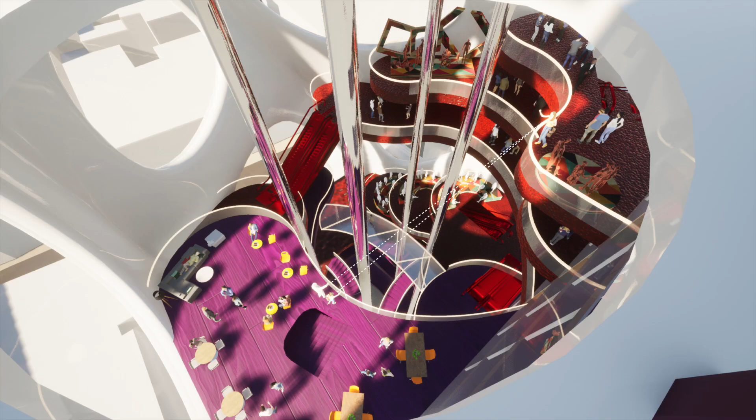Program-wise, the tower consists of museums, offices for sustainable fashion startups, retail, event spaces, recycling, co-working spaces, and a transportation hub. The program doesn't only benefit from each other to foster upcoming fashionistas, but also encourages interaction with surrounding office workers, tourists, etc., effectively challenging the current business model of the industry by bringing designers closer to the buyers.

The tower is not just a cultural ghetto, but a social catalyst which knits into the city fabric.

The tower is situated in the financial hub of London and is close to one of the fashion clusters in Bethnal Green. While the tower doesn't sit in the assessment zone of any viewing corridors, the height of my tower is limited to 160 meters to hide away from the backdrop of St Paul's from Fleet Street.

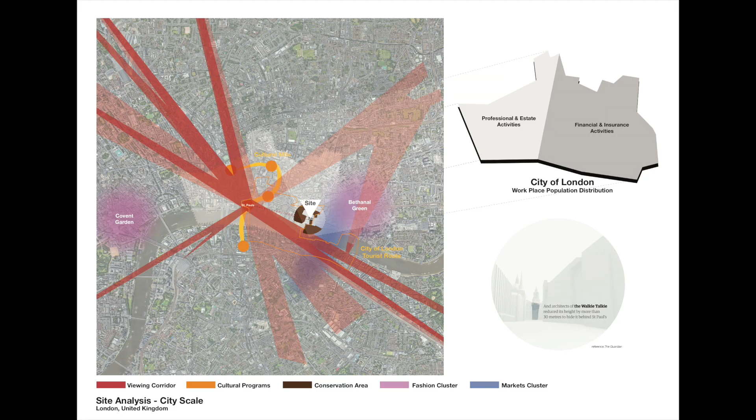On a more local scale, my site is situated on two heavy traffic streets, with a bus stop in front of my site and also two interconnected stations nearby.

My site is also adjacent to a shopping centre, with the types and size of the shops represented by the colour and size of the blobs respectively.

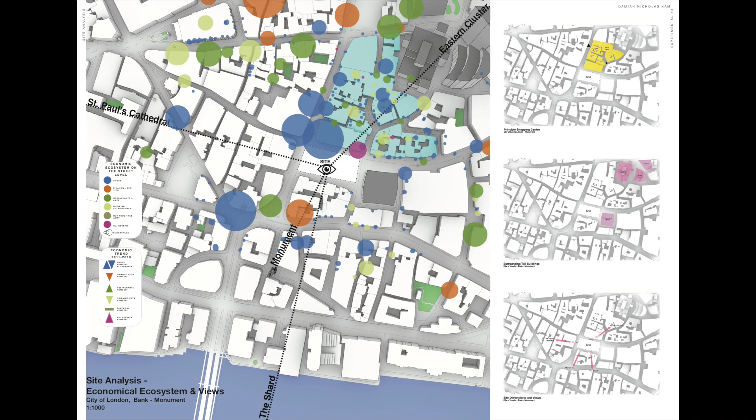After analysing the economic trends for the past 10 years, while the City of London is known for being a financial centre, the city is actually encouraging the integration of other industries, as financial services can be digitalised.

My site is also on Fenchurch Street, where the Livery of Clothworkers are freeholders of many of the lands. Based on all these analyses, I believe that my site is the perfect place to place the fashion hub in.

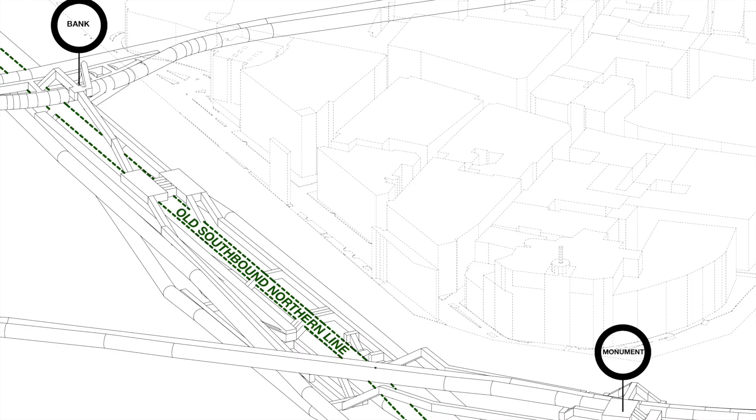The concept of my design starts from the underground, where I decided to make use of the leftover southbound Northern Line after the bank extension to create a connection to both station and my tower, effectively moving the Monument Station to my site. The advantage of this is twofold.

Firstly, the new tunnel redirects footfall from the almost full capacity bank station to my tower, given that both stations take 6 minutes to go to the Leadenhall building.

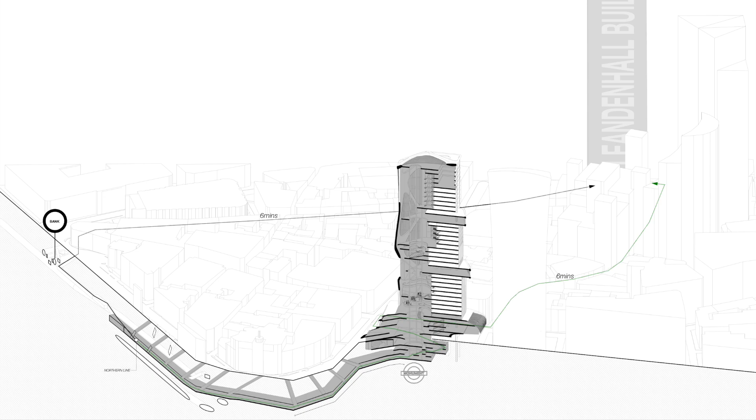Secondly, the tunnel will provide step-free access to Monument Station. The tunnel then spirals up into my tower, creating a seamless transition between horizontal and vertical.

The tunnel is occupied by event spaces, where the spiral helps create different clusters and sizes of event spaces. The event spaces are then subdivided into spaces from public museums to private atriums for private gatherings, and these are spread out from bottom to top respectively.

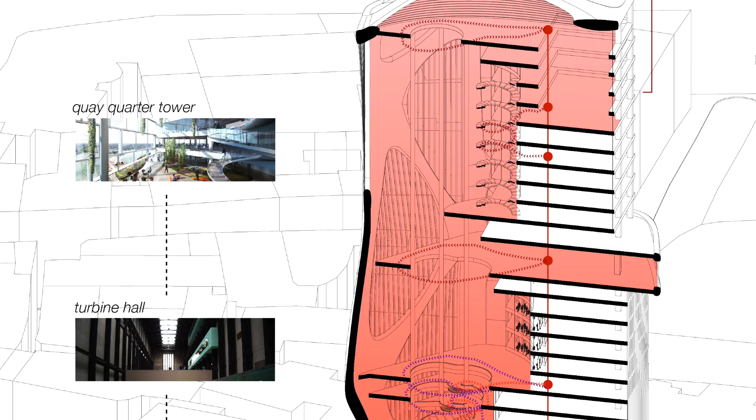These event spaces are all adjacent to retail spaces to maximize revenue, and then office spaces.

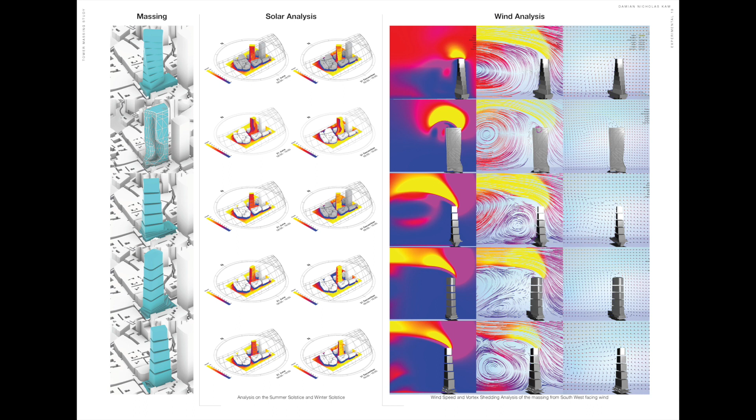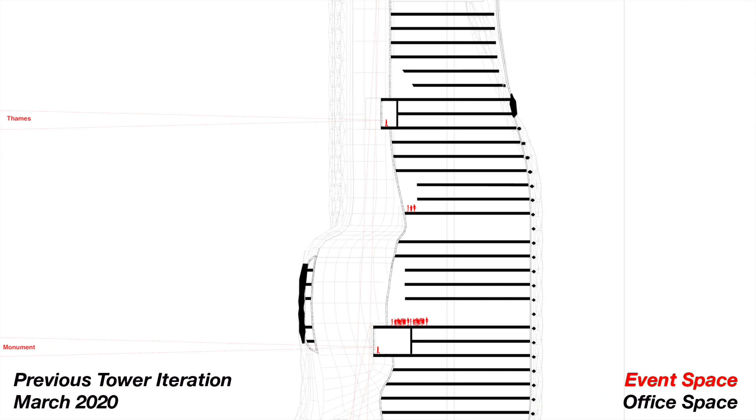I start off my massing by creating a series of shapes which correspond to the sunlight and wind of the site. However, while developing these shapes, honestly I find it really hard to find a sweet spot between the efficiency of office space required for financially deprived fashion designers and the grandness of an event space.

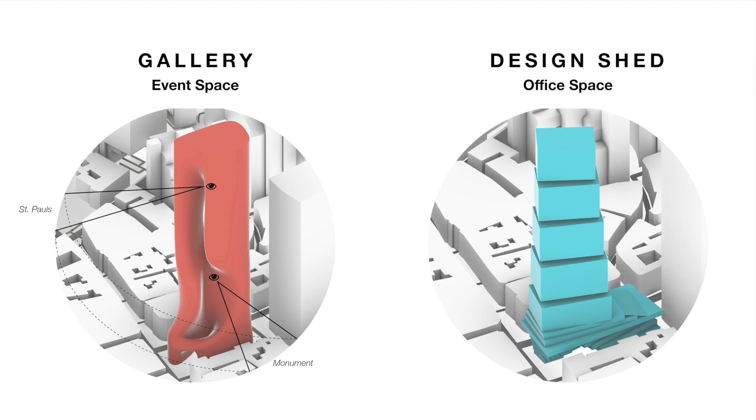So I decided to approach the design in a similar manner to the Manchester School of Art, the gallery and the shed. For my case, the event space is treated as the gallery and the office space is treated as the shed. I decided to carry forward this massing for my event space as it complements the views of the surrounding landmarks, and this massing for the office space as it is the most space efficient.

In order to create a meaningful connection between the two, I decided to look into the relationship between the two programs, which will also in turn help me decide on the type of structure.

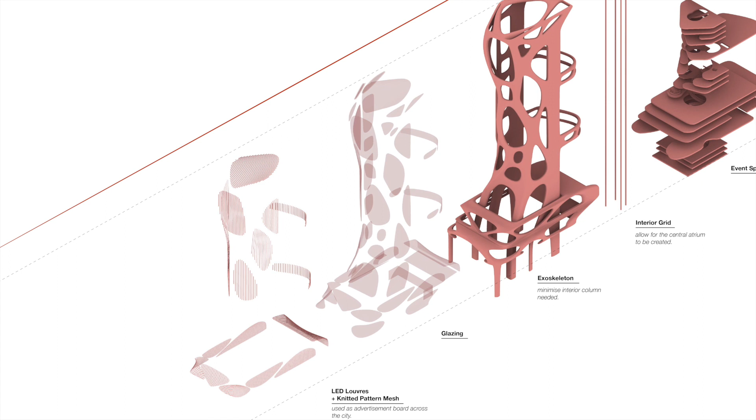Both the aim of the catwalk shows and the production is to increase sales, which is retail, unlike event space which requires a column-free floor space, hence an exoskeleton will be a perfect solution for it, and office spaces which will need daylight and space efficiency. Between the two programs, I believe a column grid structure within a rectilinear volume will work the best.

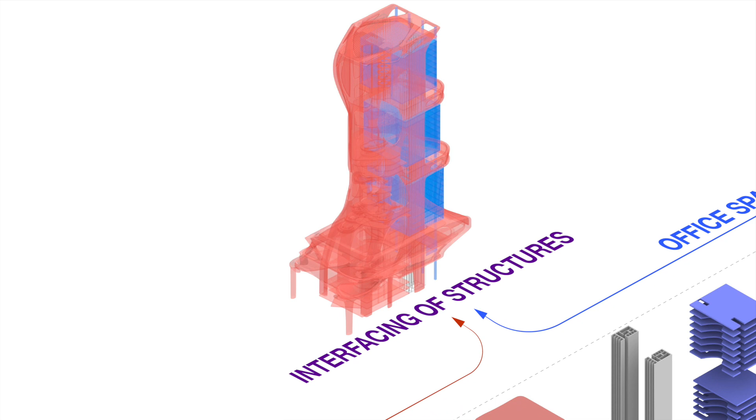And for retail, it needs wall spaces for displays and accessibility from both programs. Therefore, I decided to create an intermediate space by interfacing the two types of structure and placing two off-center cores there, which will in turn create a space with tons of wall space and guarantee interaction between the two programs.

Regarding the specificity of the interfacing, the office massing consists of 3 identical vertical villages stacked, leaning away from the Walkie-Talkie. Each volume caters to specific ways of working of different sustainable fashion brands.

The volume of the office blocks remains the same, as there is more value in floor area the higher the tower is. In general, offices at the bottom resemble more of an artist studio, and the higher it goes, it shifts to a more conventional office space.

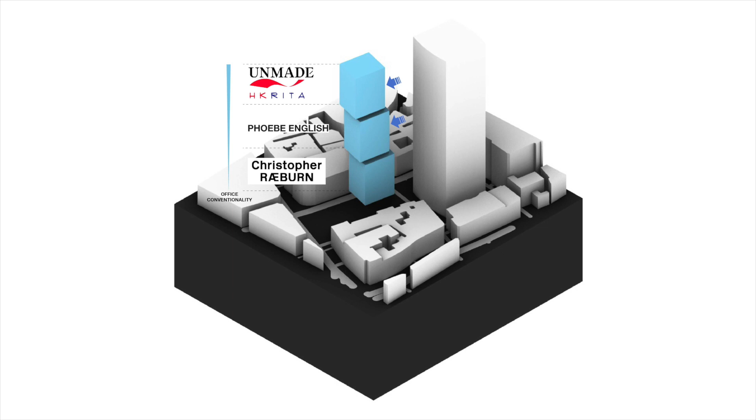And also, there is less public footfall at the top.

The event space volume is a simple twist, which pinches at the specific heights of the surrounding landmarks. Those pinch points act as viewing galleries and major event spaces for catwalk shows. The reason for the pinch is A.

For recognition of event space from the exterior, and to bring in the proximity to the field of action, allowing more seatings to be placed on the side of the stage, and also encourage the main stage to be located on the glass flooring, which is the area with the most visual access across the building.

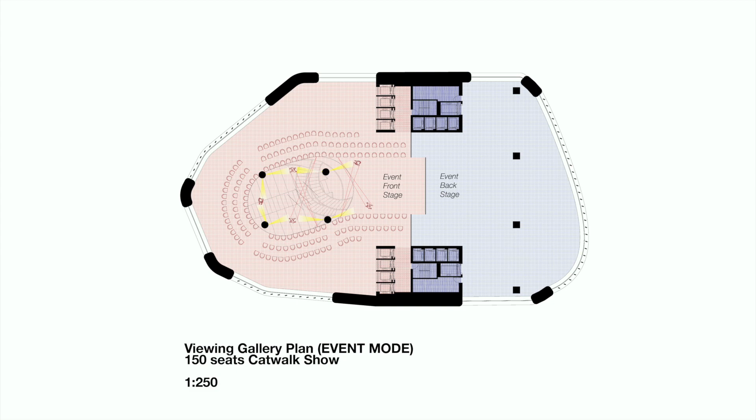The two structures are further woven together at publicly accessible places. The strong difference in terms of structure can also in turn signify the type of program from the outside.

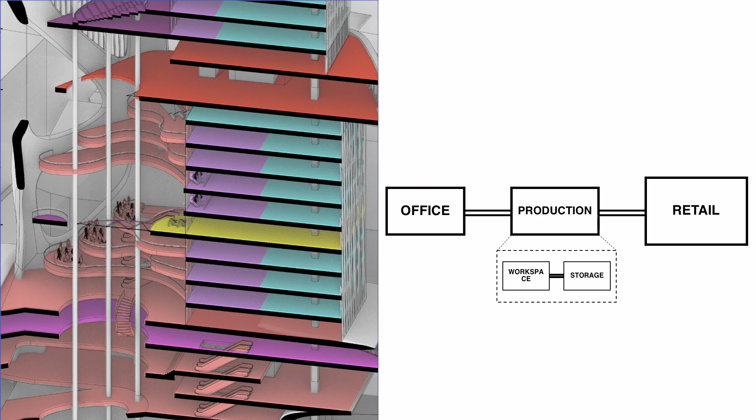Going into more detail, the office volumes are clearly differentiated between types of fashion brand. For example, the first volume focuses on brick and mortar retail and upcycling clothes like Raeburn. The second volume has a lot of emphasis on collaboration between brands and provides repairing services like Phoebe English. And the third volume has semi-autonomous production and heavily focuses on digital platforms like Unmade.

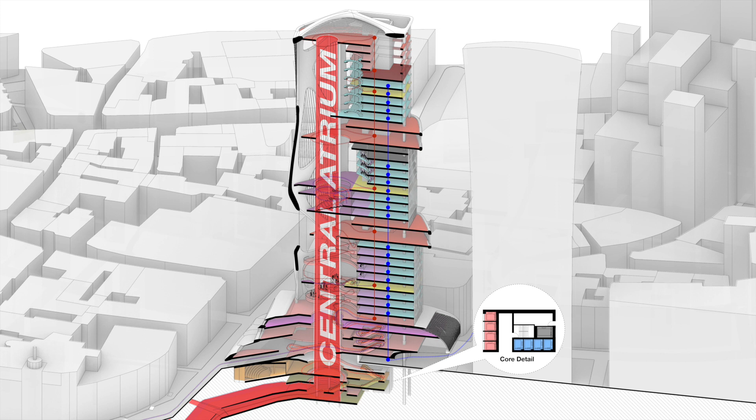The floor plates on the corresponding event space side and atrium spaces are also designed to foster those brands, with the only similarity between them being the central void and the movement of people via the lift, where office workers have direct access to the office spaces, but the public accessible lift only arrives at the viewing galleries and the dining areas. The purpose of this is to increase the duration of stay and spend of people attending events.

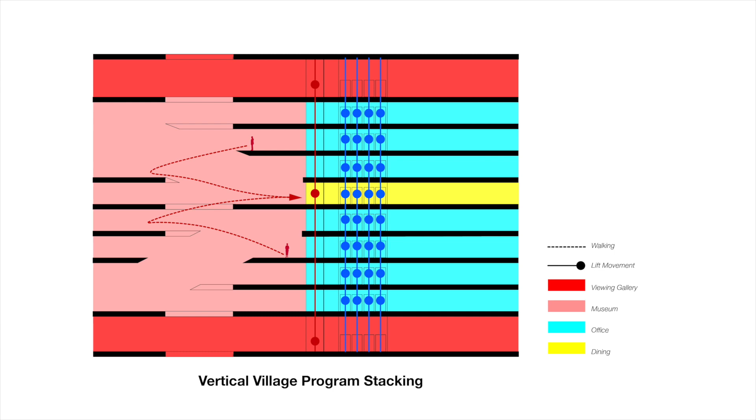The differences between each section are all made from different requirements in terms of view and quality of space. For the podium, it holds the underground tunnel, the museum, and the recycling center.

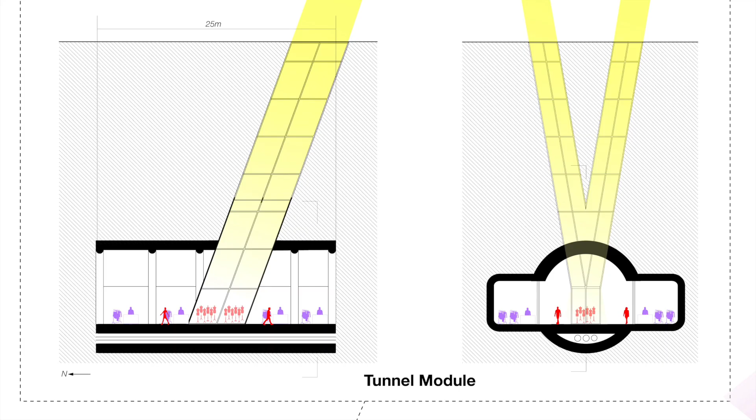Other than the concourse of the tunnel, south-facing skylights are also incorporated to bring light into the underground, but also act as wayfinding devices for the 300-meter-long tunnel. The skylights are all connected to the pedestrian walkways on the street level, which will also allow visual access into the tunnel.

For the ground floor condition, the ground level is stepped back to provide more public space for the higher footfall streets, and also provide a shortcut to the Walkie-Talkie.

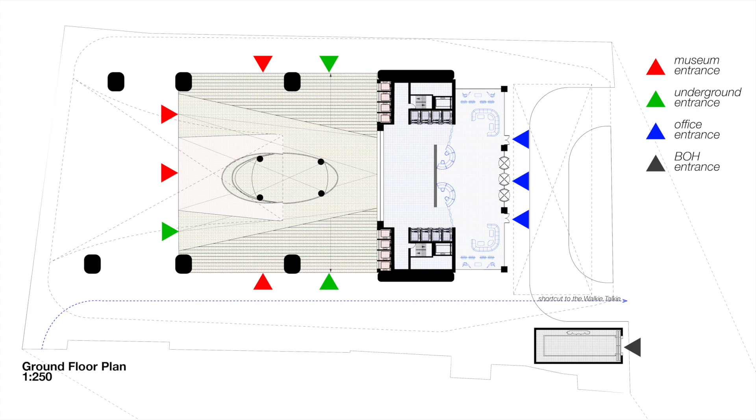The left houses the entrances for the museum and the underground, which are made out of large ramps to make the vertical circulation more inviting, while the right houses the lobby of the offices.

The atrium space of the podium is carved out from the views of the passengers on the double-decker bus and the views from the people queuing to enter the Sky Garden. The slight misalignments in floor plates also help maximize the exposure in both views.

The facade of the office blocks represents the process of knitting, from threading to twisting to knitting, and for the podium level it is in a knitted state, as the museum doesn't need direct sunlight but diffuse light.

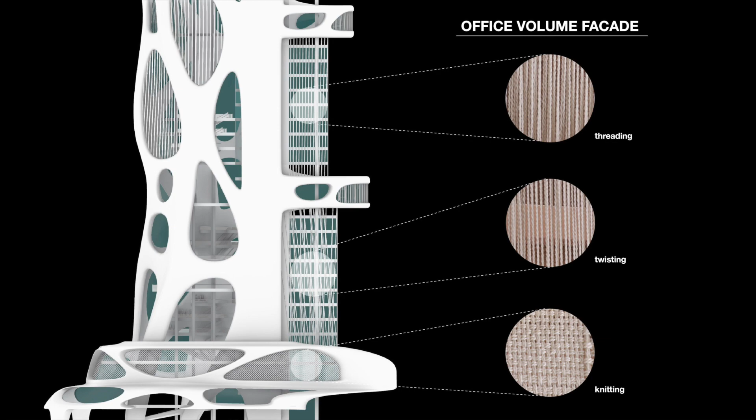The recycling center houses the garment-to-garment recycling system, which is a scalable recycling system configured for operational compatibility to community spaces. So rather than a recycling center, I imagine a space to act more like a market for recycled garments.

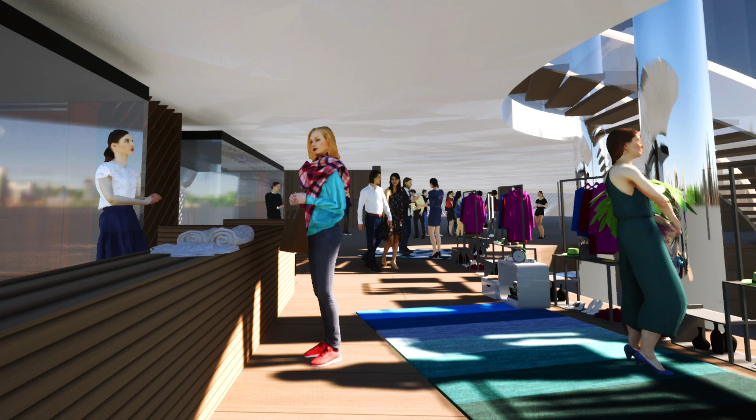For the first volume, the floor plates for the event space are a set of landscape floor plates which spiral around the central atrium, and a secondary atrium which cuts diagonally from north to south. Each floor is connected to an office.

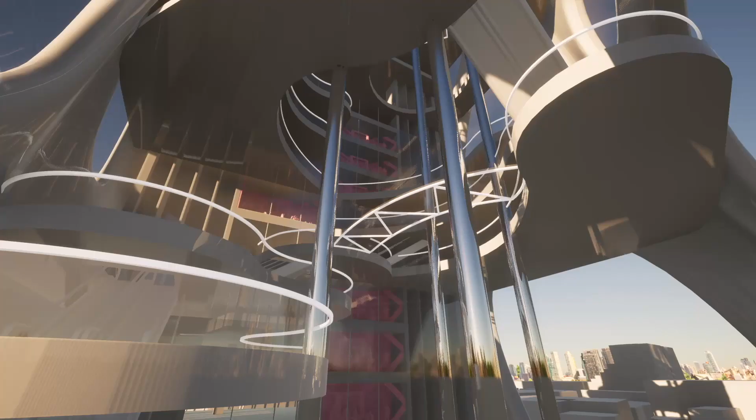The purpose of the secondary atrium is to bring light in, allow shopfront windows to be created on each floor for the retail-reliant brands, and also to maximize visual exposure of different programs.

A partition wall system is also introduced within the offices to provide more flexible spaces to suit more flexible programs, like retail, within the mode of working of a fashion brand.

For the second and third volume, it works in a very similar manner. The office volumes are carved in to maximize exposure from the viewing galleries and the event spaces, and there is a co-working space on the second volume.

The central atrium is slightly stretched out to allow exposure to the windows of the office spaces. The floor plates are also slightly landscaped to allow for visual access across the floors.

An event space is carved out at 144 meters on my tower, where the event space connects to the Sky Garden height-wise, which allows people to look across.

Louvers with LED screens are also installed on the openings of the exoskeleton to use as advertising boards across the city. Each window is targeted at certain landmarks across the city.

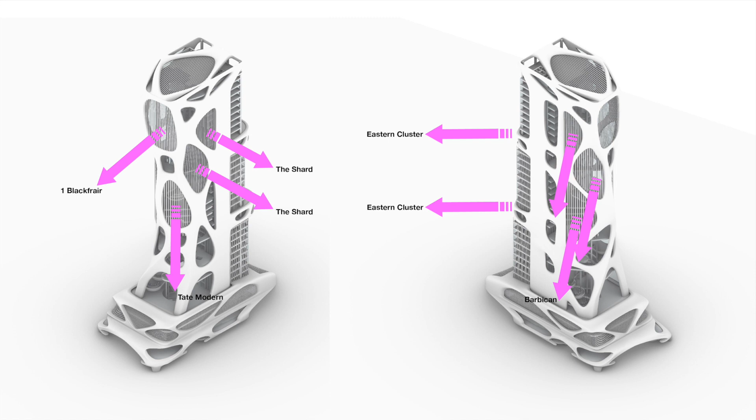At the moment, the louvers are 30 centimeters wide and 70 centimeters apart, as it is the balance between the clearness of the advertisement and the solar access into the floor plates, from the distance of the viewing deck in Tate Modern. However, I believe I can work on the individual landmarks to specify the density of louvers on each window.

I would like to wrap the presentation up by quoting Victoria Camblin, the executive editor of 032C, on the fashion industry under the coronavirus scene.

Brands are perishing now because they have a pre-existing condition. The whole COVID situation is really just a question of transparency and visibility. The luxury industry is suffering because the structure of production is not visible. The framework is not solid.

Visibility helps weather crisis. While I'm by no means a fashion expert, I believe my proposal of centralizing the whole industry within a tower in a city context will provide what the industry is lacking: visibility and sustainability. Hence, I believe my tower is the future of the fashion industry.